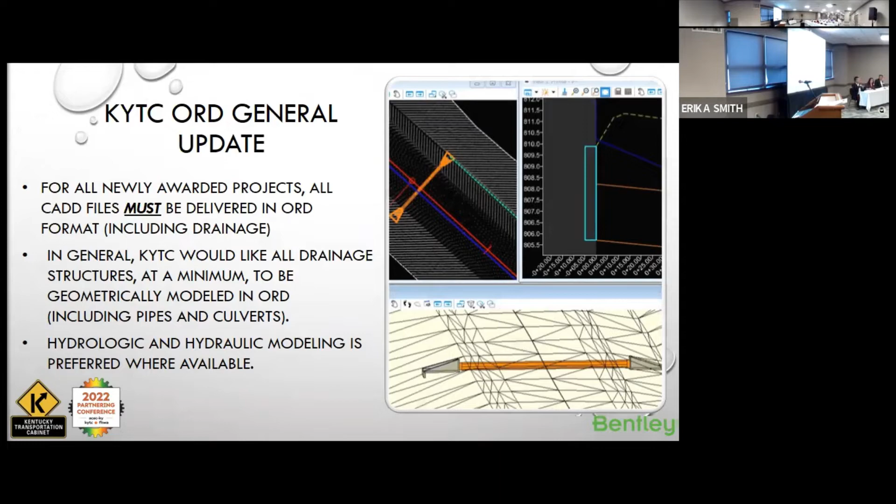Can y'all hear us okay? Yeah, can you? So ORD can provide many hydraulic and hydrologic elements, which means they can do rational runoff and storm sewer calculations. We have included storm sewer calculations and some spread analysis. We have not approved culvert analysis, so please continue to use HY-8 for culvert analysis.

We have actually now gotten inlet head calculations to work, now that we've gotten the ditches to be better feature definition with the new release of the ORD standards.

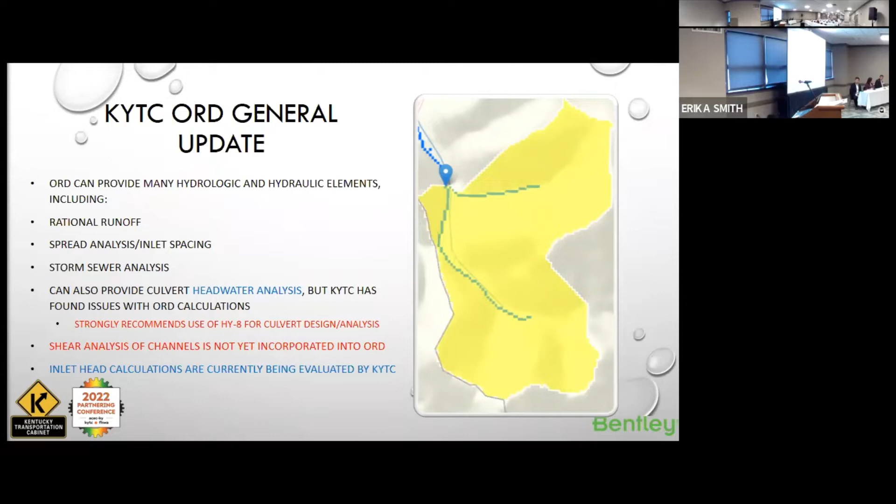And now to talk about parametric cells. So has anyone used parametric cells before or are familiar with it? Okay, we got one, I see. So why are we talking about parametric cells? Does anyone know what parametric cells are? We'll cover that. If you do, raise your hand.

All right, so the current workflow for ORD EU is to create an individual cell or pair of cells for every single node, and creating those cells and a combination of cells is a big pain. So has anyone ever had to create any part of that workspace or had to create their own cells before? I see a lot of ORD users. If no one has done that, it's okay, but it's an important skill to probably learn how to do if you need to create something that's not available in the workspace.

So the problem with this method is that it takes forever. You could potentially have thousands upon thousands of different combinations depending on your state, because you guys have a lot of different standards, a lot of different combinations of top and bottom nodes for your vaults or your inlets.

So what are parametric cells? These are kind of special cells that you can create using variables and equations and definitions that are grouped into variations. So what that means is you create your standard detail sheet and you have a box that has all these dimensions on it. But when you're using regular MicroStation, you're just drawing boxes by hand and it has no smartness to it, right?

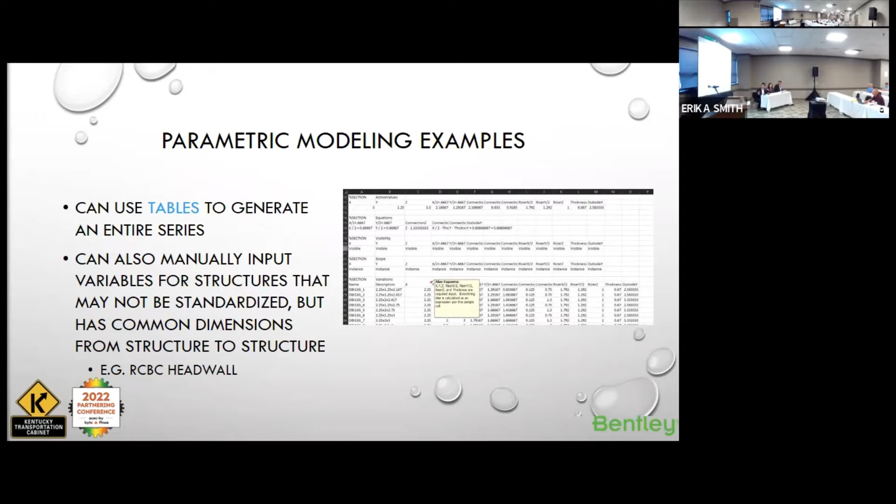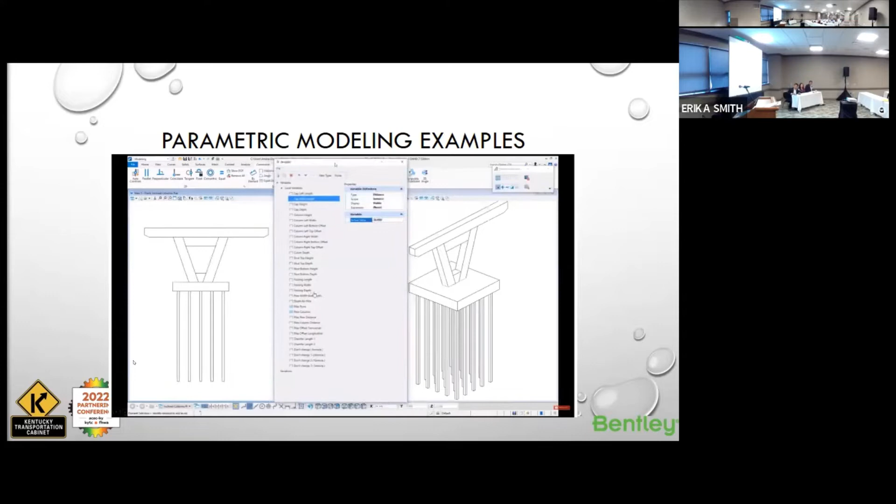So here's an example of using parametric modeling in a bridge scenario, and this is kind of required for certain bridge features. Has anyone ever used ORD or OBM? In this case here, we have a parametric cell created for different parts of the substructure for this bent, and I'm just going in and selecting different parts that I had already created and typing in a variable.

So as I'm changing some of the values, you can see it automatically changes right there. I didn't have to go in and create a fence and stretch or redraw or reproject anything. I had already figured out how it's supposed to act, and now I can just key in the value for that.

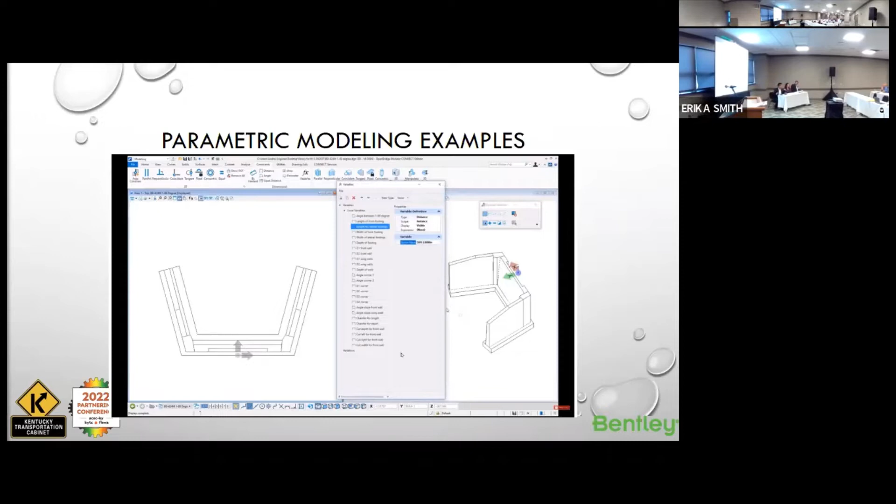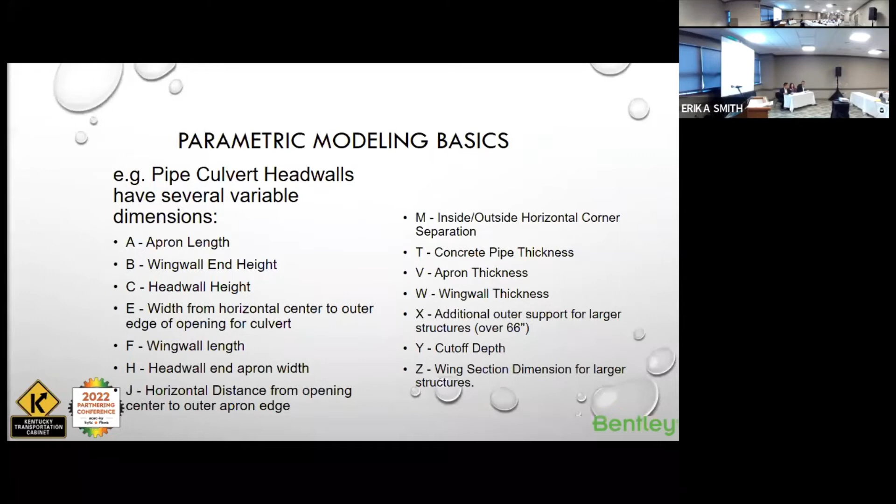So an example of where you could potentially use this in EU is obviously for head walls, where you have a lot of these standard variable dimensions that you can customize into your parametric cell, so it looks more familiar to you. Your Z value might be different than my Z value because I don't do work here, but you can customize it any way you want.

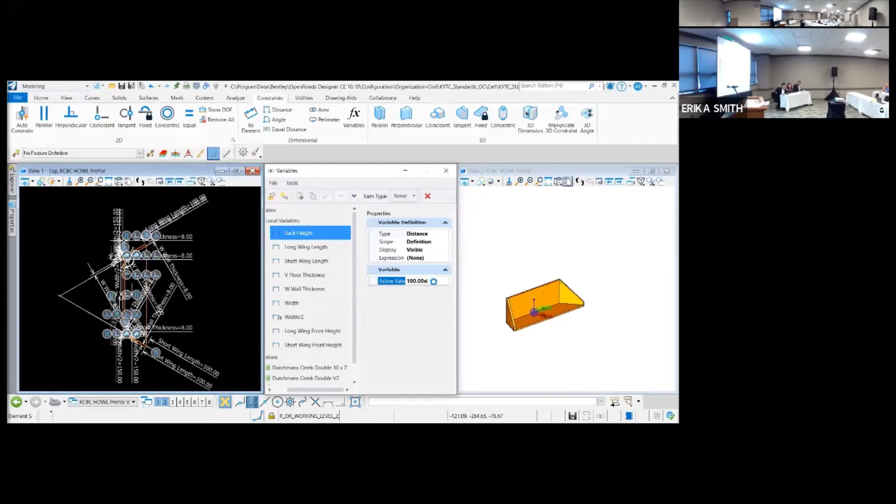So here's an example of one of your detail sheets, and you can see you have all these different variations - A through J, or A through Z. This is kind of what it looks like: on the right you see your 3D side, on the left you see kind of how it looks. You have all these different kinds of MicroStation constraints, and you can go as crazy or as simplified as you want. You can use this for 2D or 3D.

And here I'm just changing some of the values for the wall thickness, and you can see that it's a lot thicker.

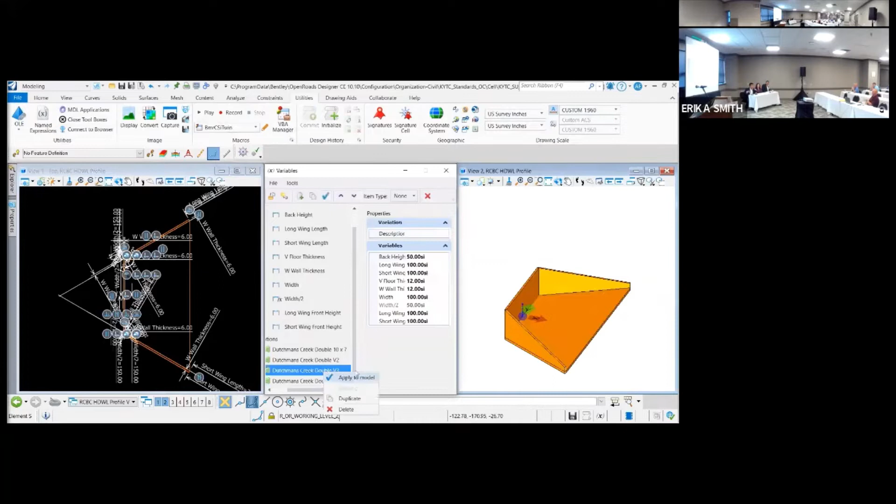And after I change some of these individual values, I can save them as a separate variation - it's a group of variables. So if I know that 12 variables change between one version and another version, I can save them as different variations. Now remember, this is just MicroStation cells.

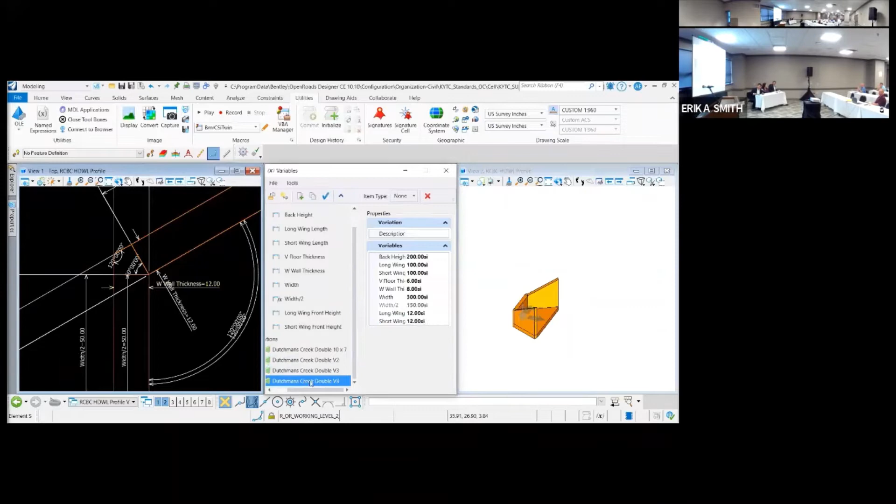So there's not anything smaller. You have a lot of different options where I can hide the different constraints, I can hide the different dimensions. You can see there, I typed in wall thickness equals 12, or 10.

So other examples are sloped and mitred headwalls. I mean, it's really anything three-dimensional or two-dimensional that you typically draw over and over again, which is the definition of what a cell would help you with. But parametrics adds that smartness to it.

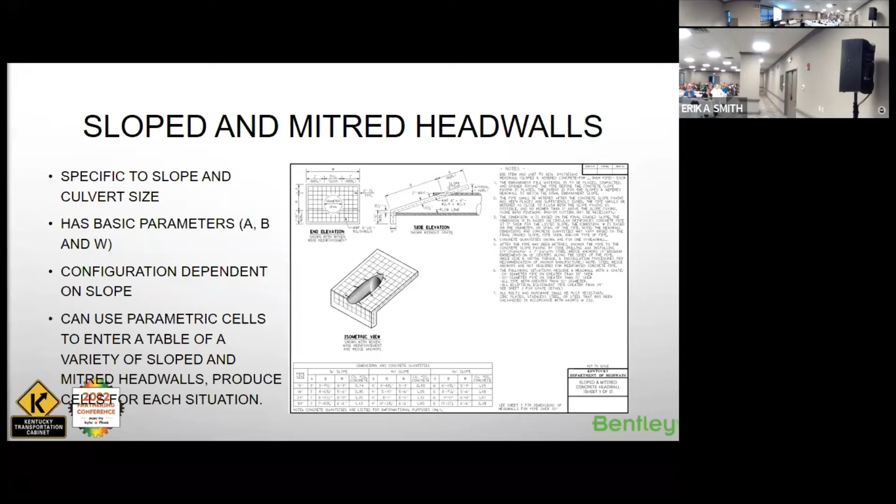There's a lot of tips and tricks that Erika will go through later, but if you start playing around with it, you can see how it can be very powerful and kind of streamlining some of the tasks that you may do. You can use this for not just bridge, you can use it for anything really in MicroStation.

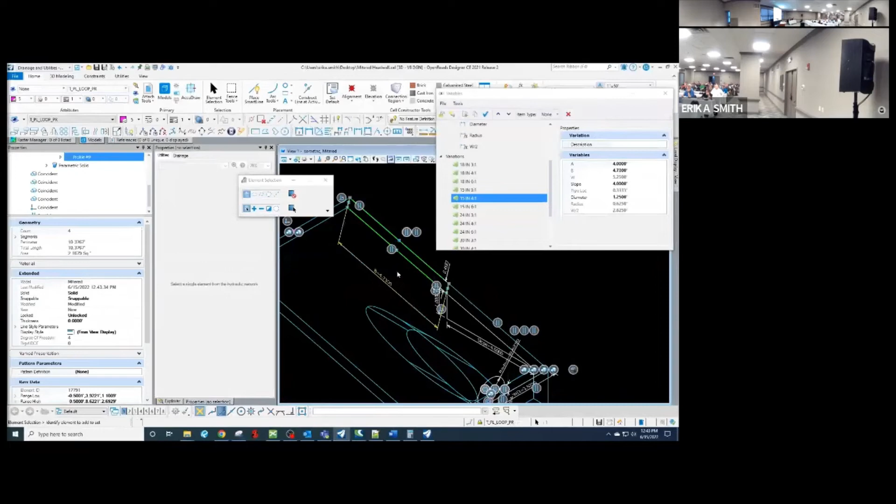You see a lot of mechanical engineers kind of gravitate towards this, or mechanical modelers, because they're used to doing machining and a whole bunch of different variations for different optimizations. But this will definitely apply in scenarios where you have a lot of details.

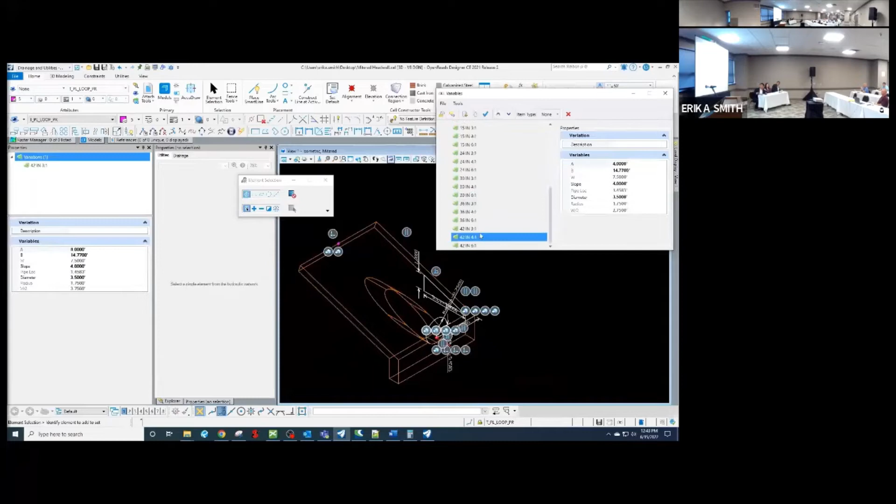So here, I'm just going in and selecting different variables, and it changes a bunch of the groupings, and you can do the whole width, the size, and the positioning.

So to show you what it is, if someone's ever looked at it before or done it before, this is the very basic definition of a parametric cell, or how to create one. So I'm just creating a box.

I don't know if you guys can see that. I'm just drawing a box. And I'm creating a new variable, so I'm just going to do X, Y, and Z.

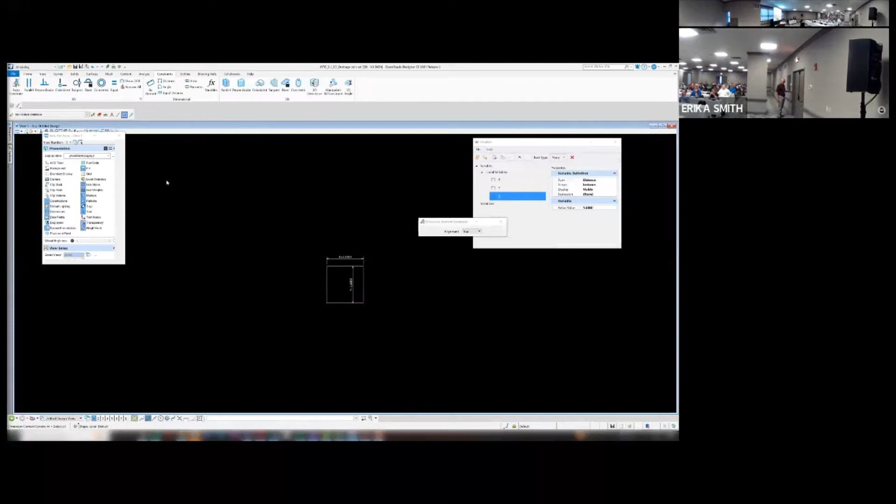And here I'm defining what those variables are. So I drew them and created variables, and now I'm going in and applying those variables to the different pieces of the box that I created for the square.

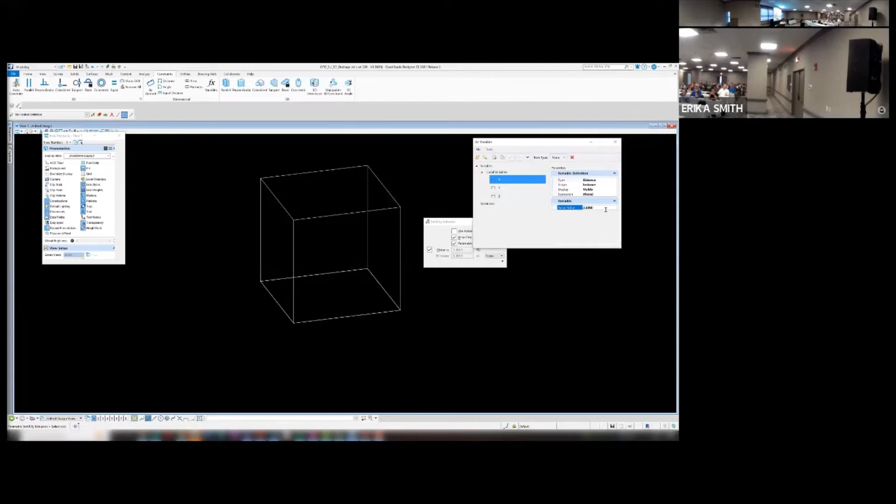MicroStation and OpenRoads by default has all of the same modeling capabilities, and 3D modeling tools and features. So I extruded that up, and now I'm going to apply the Z value to that extrusion.

And now when I go and change some of the variables, I do this as a test. I create a variable, I apply it to the MicroStation elements, I move it around, I test it. That's going to be very important if you start messing around with this.

I can turn on my constraints and my dimensions, and then I'm going to create a variation, which is a group of variables.

So it really is kind of simple, right? But this looks like it takes a while, especially after you do 1,000 of them.

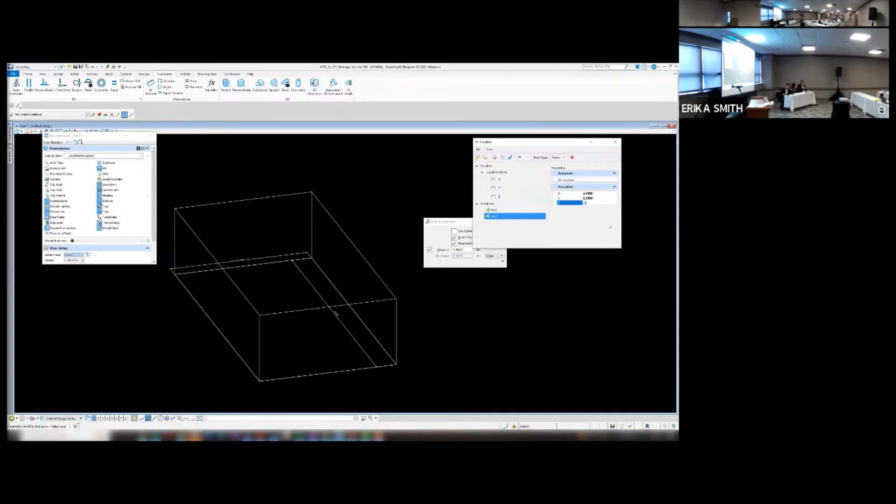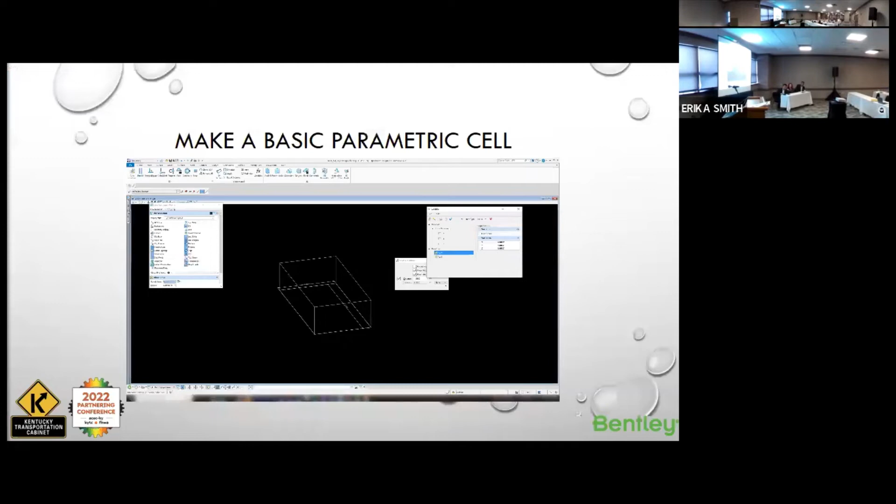And so I hit the check, move it around, I change some of the variables, I change the variation, and I apply it to see what it looks like. I'm constantly checking. So what this looks like, if you don't use DU, this is an inlet cell.

I mentioned before, you can export this to Excel. Really, that's one of the key parts of using this, in terms of having an Excel sheet.

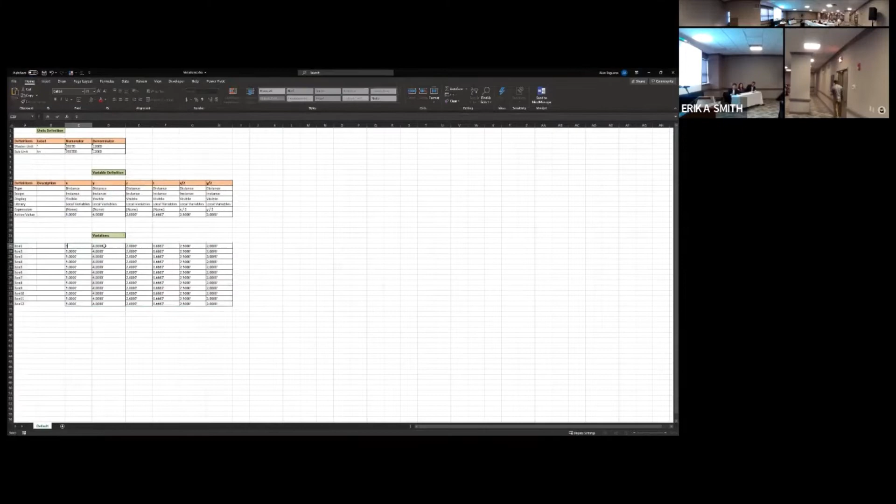So here I just created a bunch. You can just copy and paste it, if you have a PDF that has it

defined for you, or you can create equations, right? You can create mathematical equations. So if your definition or detail sheet says this is an equation of another variable, you can apply that here as well.

Part of the problem, or the challenge we face, is that right now DU has kind of a bunch of these different separate pieces. You have to create all these individual cells. Parametric cells can help streamline the process of creating those cells, but you still kind of have to apply it into a useful format for ORD.

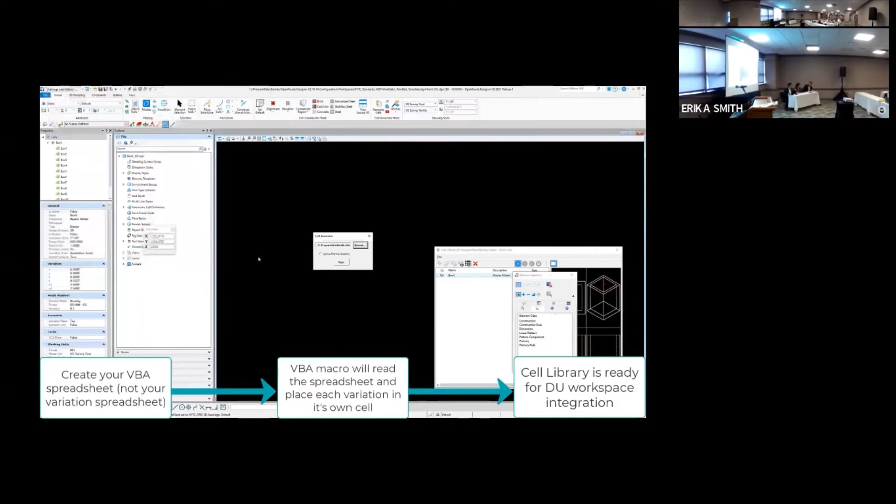And so there exists a VBA in which you can take one variable, or say one or multiple parametric cells, and it will create an individual, dumb, static, old school MicroStation cell for you to be able to utilize with DU. In the future, we hope this will go away.

See a lot of flashing in the background.

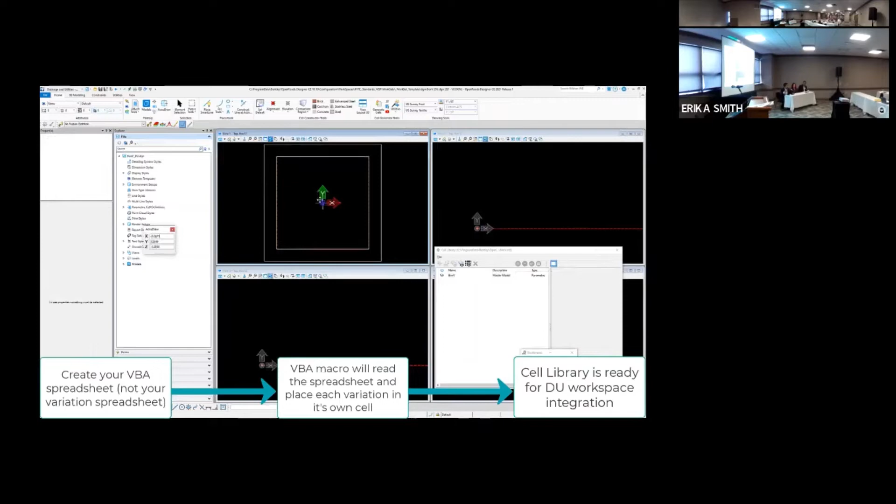Well, pretty much what this does is it goes down the Excel spreadsheet. It says, place this variation in this one model, create a new model, go to the next one, create the next, drop the next cell, put it in. So it does this kind of loop process to the end of the Excel spreadsheet.

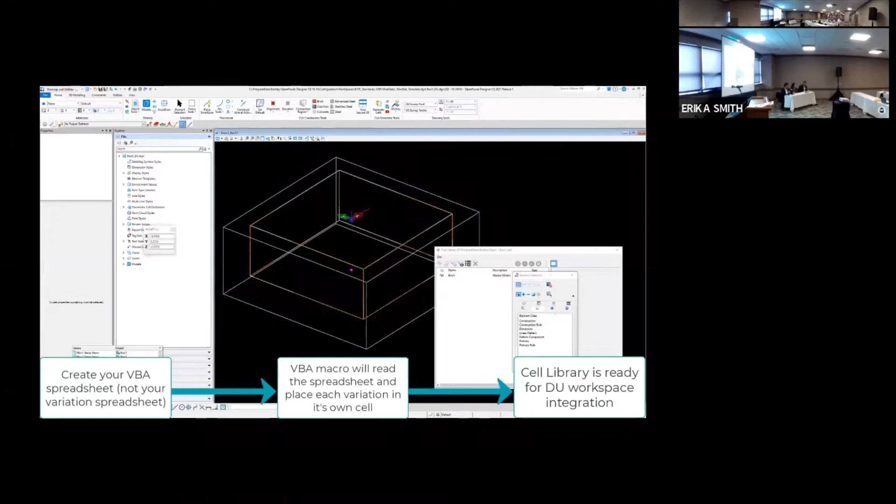So if I had to create a bunch of cells for a DOT and I had 1,000 of them, and I know that I had say like 1,000 different variations, I wouldn't have to manually go into every single model, every single cell, and modify every single one. I can instead create one cell, spend all this time creating one cell, drop it in, use my spreadsheet, use the parametric cell capabilities, and streamline the process that would normally take about a week, maybe 2 weeks, maybe a month, down to a day, maybe 2 days.

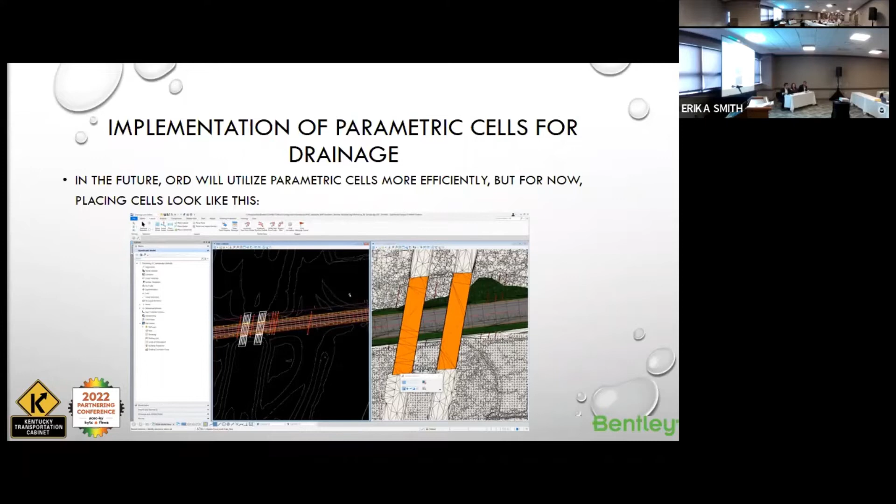So in the future, parametric cells will be used a lot more effectively with DU. But currently, in the current available product, this is pretty much what it looks like. So this is for anyone who hasn't used DU before. It's all kind of 2D/3D based. I have my 3D on the right, my 2D on the left.

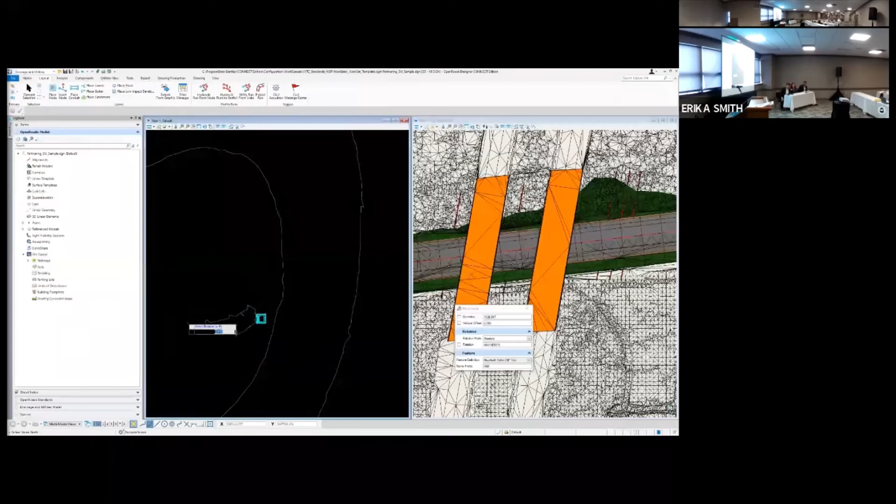And here I'm just placing a node. This could be a head wall, this could be an inlet. You notice here, putting it in the 2D and defining its rotation and its placement. I can even define its elevation, or if I'm reading a terrain or a proposed corridor. And on the right, it automatically places the 3D plane. Does this look familiar to anyone?

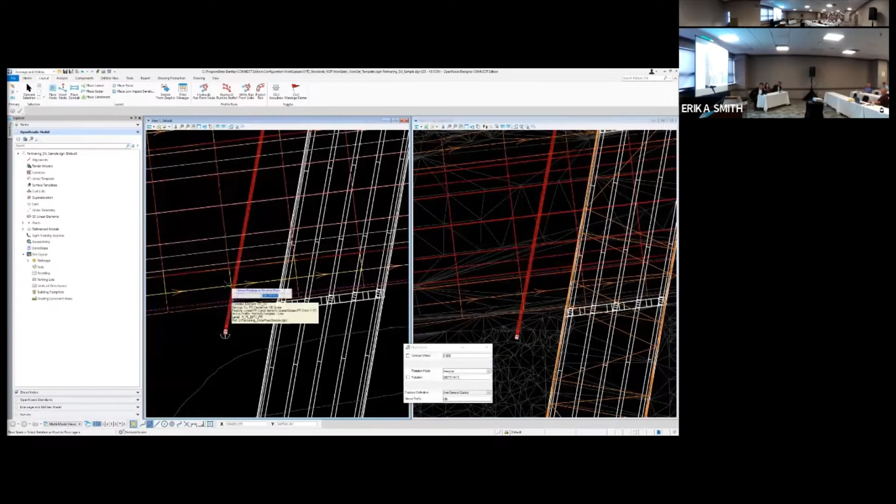So I did want to illustrate that I used the terrain model as the z-value the first time. In this one here, I'm using a proposed ground. And it's rule-based, so if I created an inlet and I dropped it on top of someone else's proposed corridor that's being referenced in, and that corridor changes profile or super elevation, my inlet should update with it if I have the right checkboxes.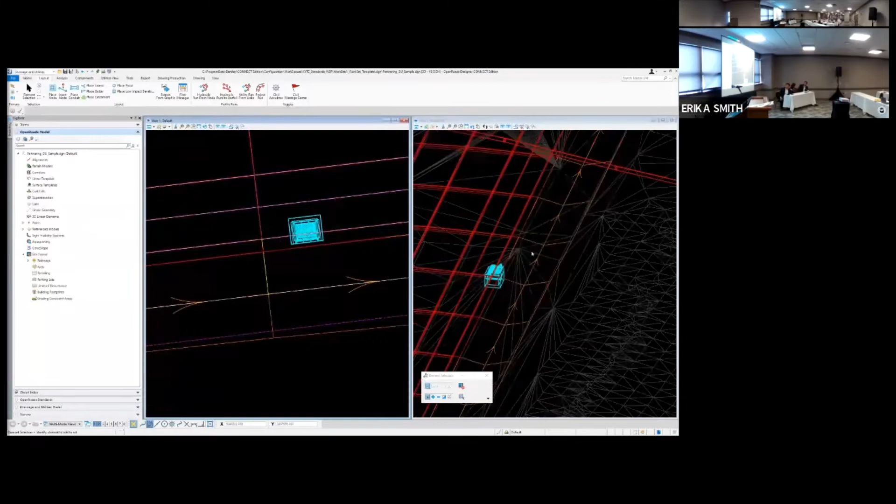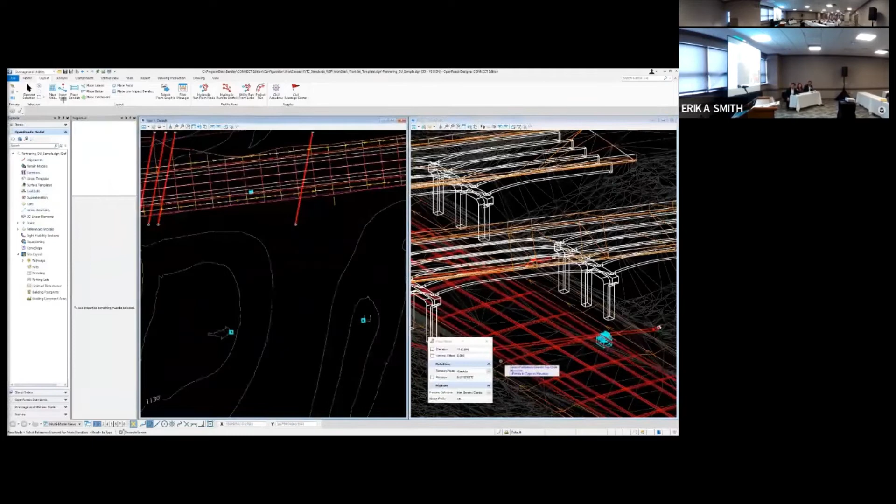Sometimes you want it to automatically update, sometimes you don't. In this case, I may not have wanted it to be automatically updated if someone changed it, but it's easy. I can just go in and change the value and make sure that my elevation reference is the asphalt surface, and it moves up. And here I'm just placing a manhole for a junction.

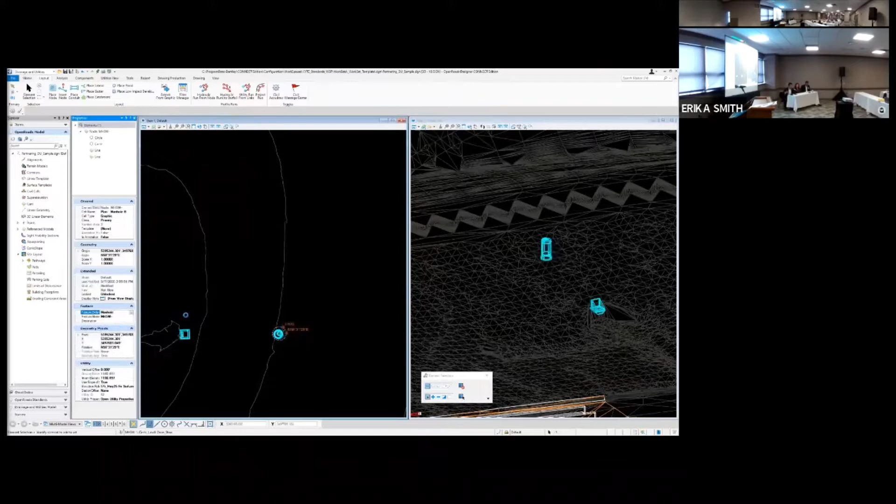After you place it, we want to get away from this idea of deleting and redrawing. I want to try to avoid deleting it because there's some intelligence to it. It's a practice that we should try to learn with ORD, much different than the older versions where there's a lot of delete and redraw. But here I just went to the properties and changed the node from one feature definition to another, one junction to another, and it changed.

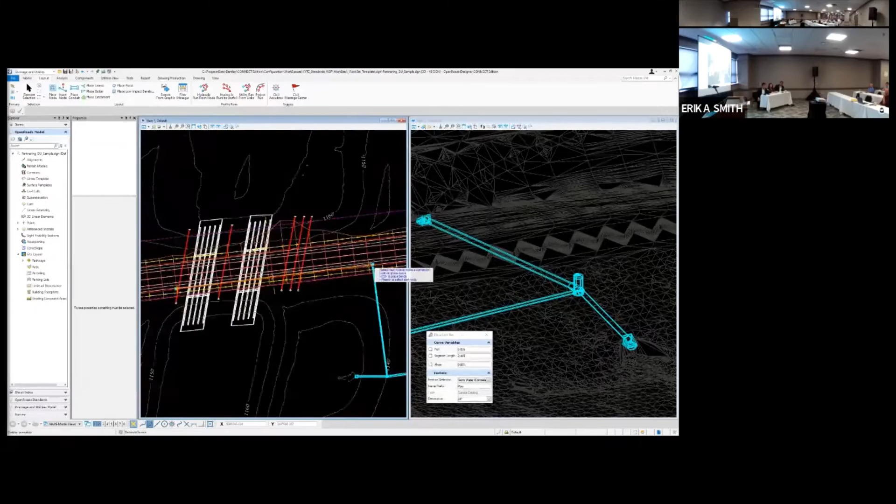I'm doing everything on my 2D on the left side, but you can see it's automatically being placed in 3D. It's also automatically choosing the profile for me based on some defined parameters, and I may not want that. How often do we let the software do everything on its own the first time? So I open up the profile view of one of these runs, hit the 3D cut button, and I can see the cross geometry. Anything in the 3D model I can see in my profile and cross sections.

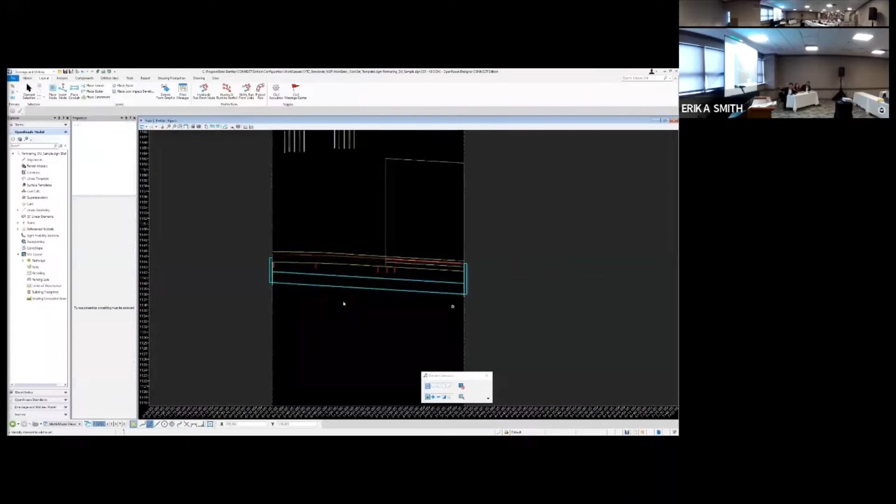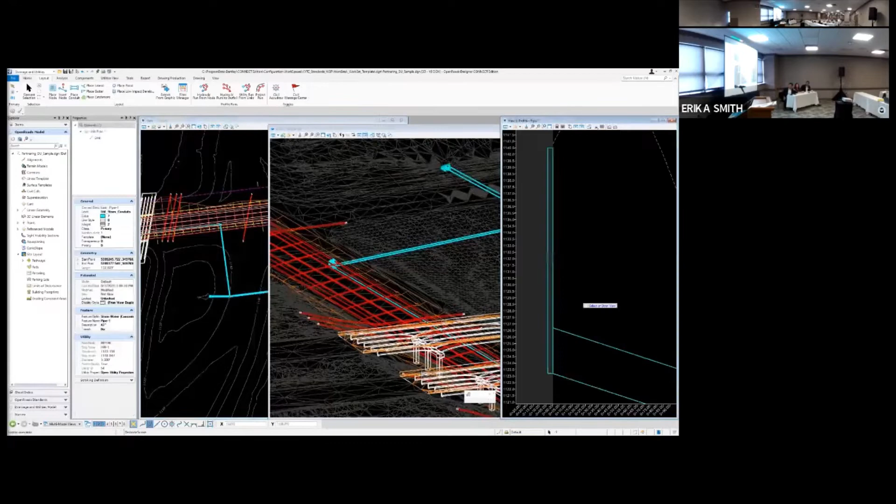I wanted to make sure I had enough clearance between some of my crossing utilities. All I did was go into the individual run at one pipe and change the profile. And you can do this a number of ways. Some of these might be static. I might have to change a pipe, or maybe change the inlet depth. But you have a lot of flexibility in modifications after it's placed.

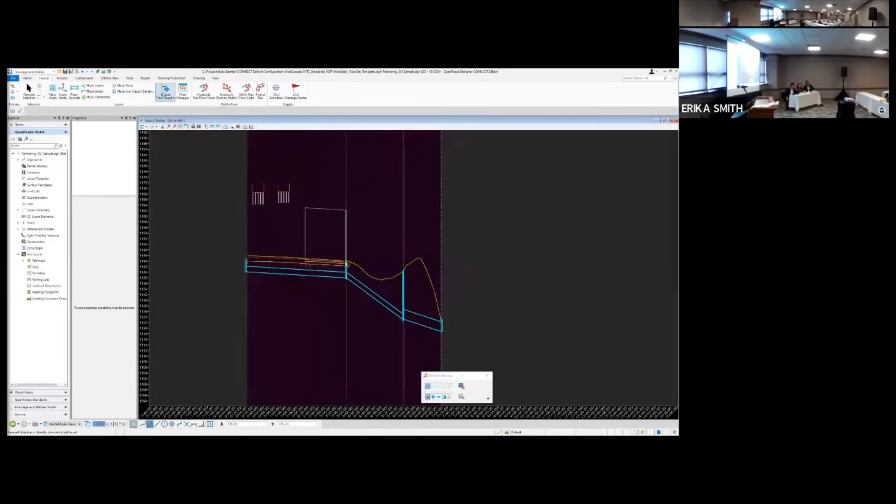If you update it in your plan view or profile view, it will automatically update in 3D. This is different from InRoads, where you had to process something and display it and go through each click. This happens automatically. Here I did the same thing. I can see my bridge, some crossing pipes, the asphalt pavement, and make sure I have enough clearance under the asphalt pavement.

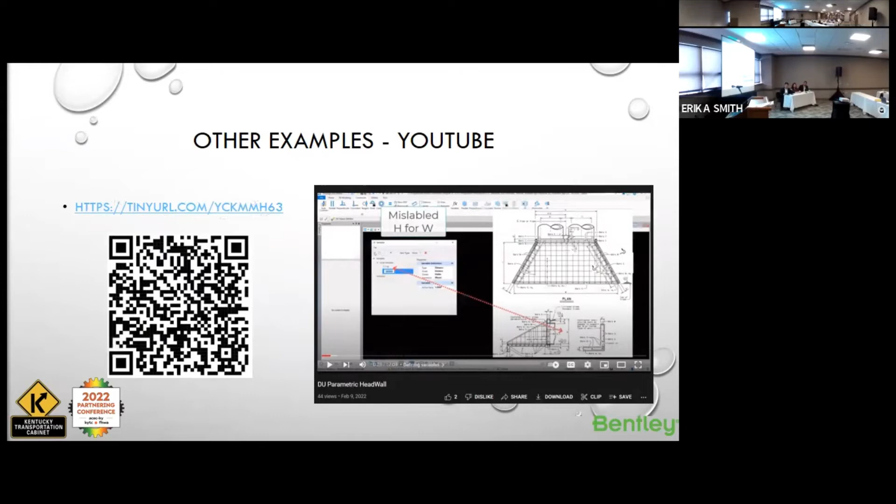So some tips and tricks that we found helpful were to make some helper lines. These helper lines help develop the parametric cell so that you don't have to completely constrain the parametric cell. This way you can constrain it to the origin 0, 0, 0. This video shows constraining some helper lines to 0, 0, 0, and then constraining it perpendicular and then rotating it. The video goes kind of fast, so I'm just explaining what's happening.

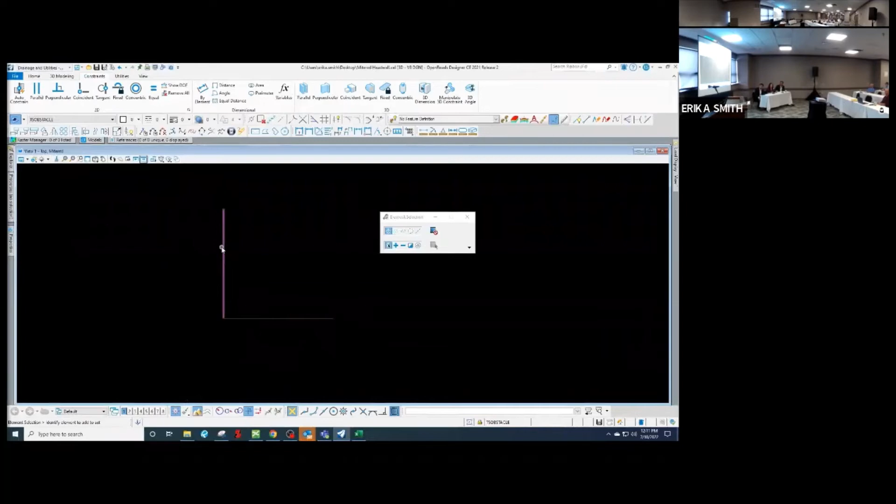I'm just drawing some lines and then drawing it at 0, 0, 0. Then I'm going to constrain it with a fixed constraint at 0, 0, 0. And then I'm going to constrain it with a perpendicular constraint just to have them rotate together. And I'm just going to move them to show that they're actually constraining 0, 0, 0. Kind of went fast, so sorry about that.

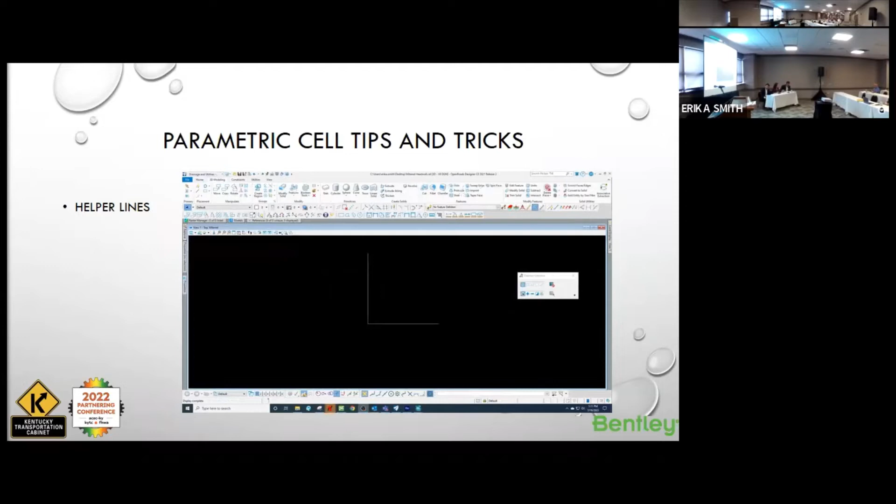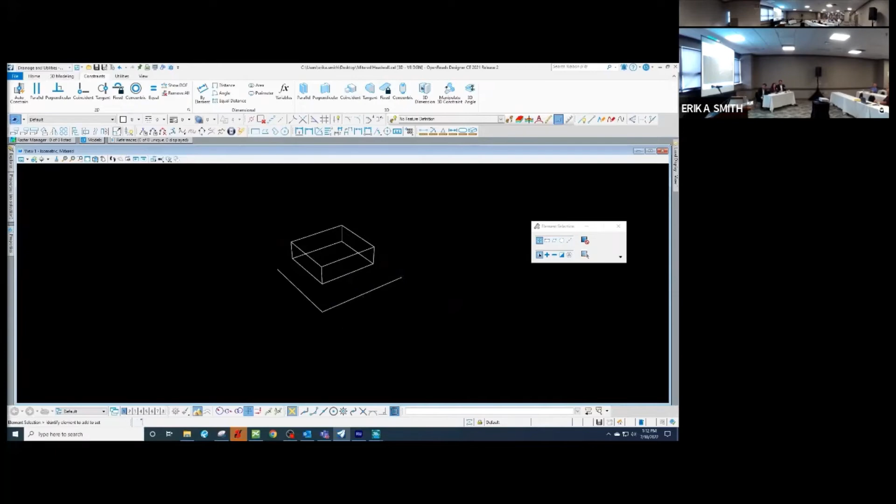And then you can actually constrain your parametric cell to that line. This video shows drawing a cell and then constraining it parallel to one of those helper lines, and then it will rotate with that. I'm just going to draw a box and then extrude it. And then constrain it parallel to one of those helper lines, and then move one of the helper lines, and it's going to show that the cell actually moved with the hover line. And this helps just keep everything clean and where it's supposed to be.

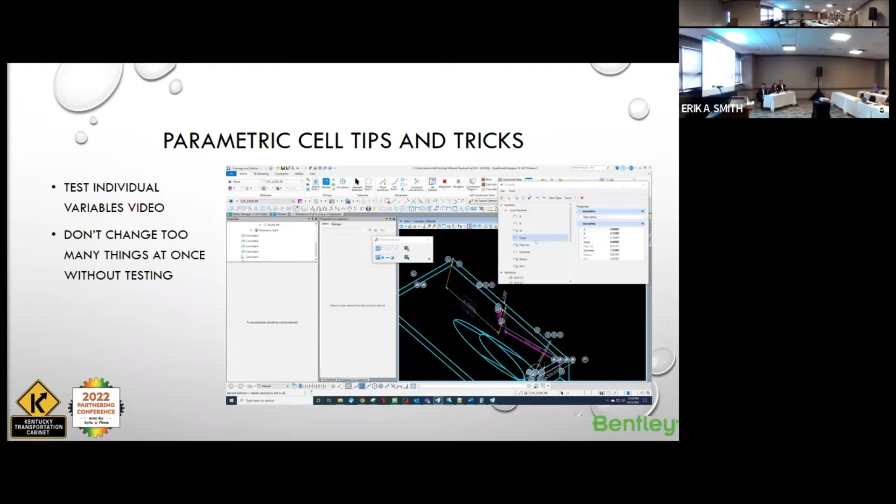As Alan mentioned, as you develop all these variables, you want to test them often. You want to not change too many things at once because you could break things and not notice. So this video shows testing a variable in different ways just to make sure that it works. So here I'm just changing a variable to make sure that it works. Changing it to 2 and 3, 4, make sure that it's expanding the way it's supposed to. You want to do this often to make sure that nothing breaks.

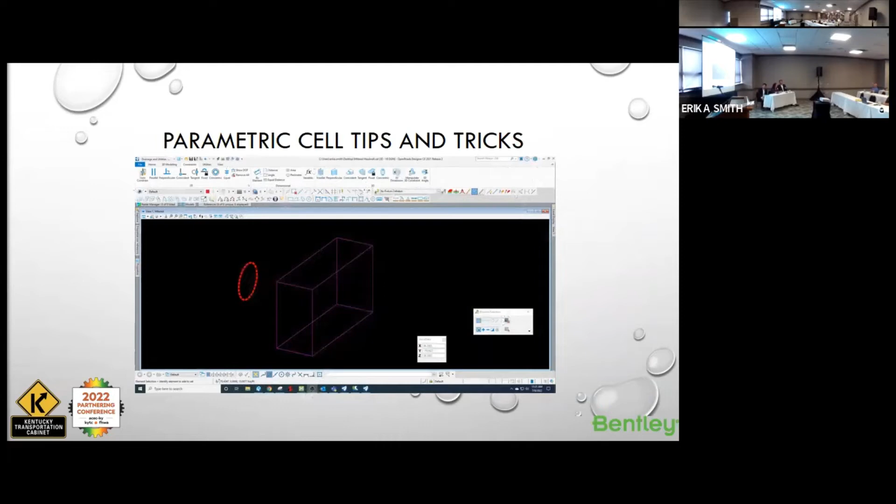Another thing is, since you're working with 3D objects usually, you want to make sure that your view is in the correct view. Because if you're constraining concentrically, you may not be able to constrain something to the correct face of an object. So say I want to constrain this red circle to the back of this object. I can't do that because I can't actually select the back of this piece in this view. So this video shows that. So I'm trying to select the back of it, but I can only select the face of it. So I have to rotate my view. So be very careful with how you've got your view oriented.

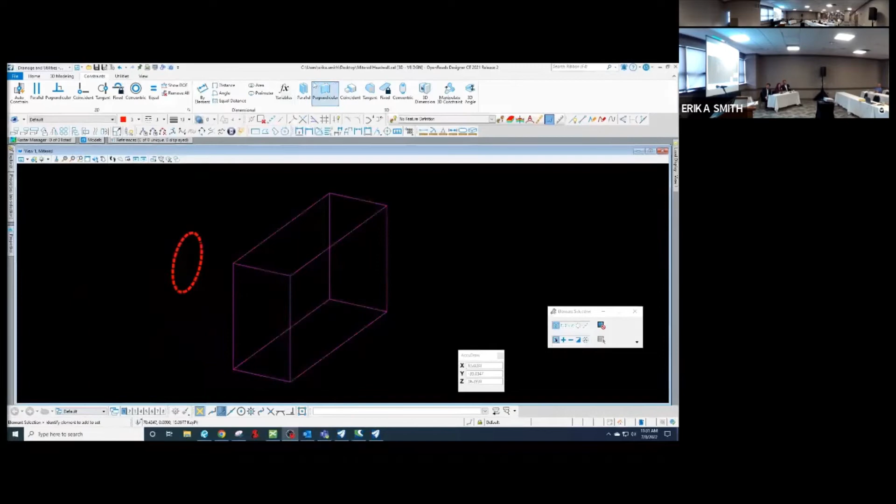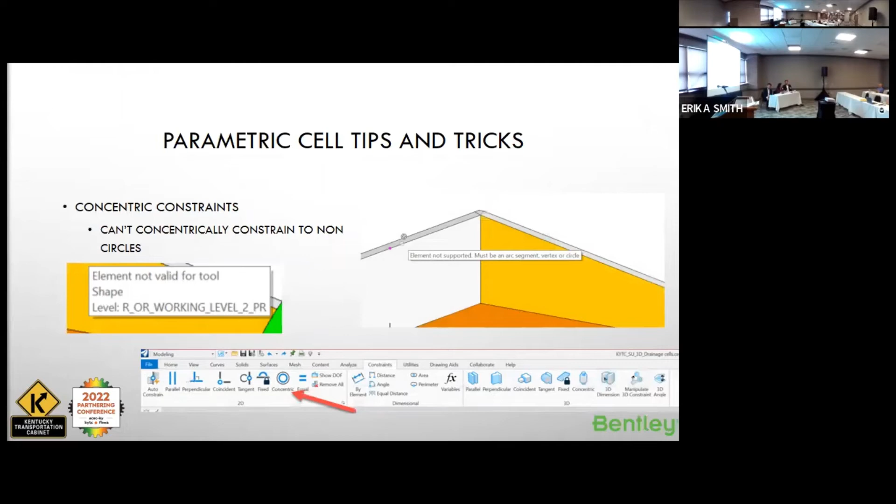And then also you cannot concentrically constrain circles to non-circular objects. So say you're trying to get the punch out for a pipe in the head wall, you need helper lines to help figure out where that center or where that pipe needs to be if you've got a multi-pipe head wall, because you cannot concentrically constrain that to go to the back of the head wall. Also, do not merge solids. I know it looks nice, but it will break the constraints of the parametric solid.

Also pay attention to your error messages. This will help with your testing of your parametric solid, because you can over constrain your parametric solid, and it's happened to me before, and I've had to unconstrain it completely, or unfortunately start over, as Alan has gotten frustrated with me. And then also set marks for undo, because this can also help with testing. This sets a place in the file for undoing to. This can help you to not have to completely start over.

So if you've got a place where you're pretty good with your parametric cells, set a mark and then continue to test it. And then if you mess it up, you can undo to that location where it worked. So the set mark for undo, this isn't new, this has been in the product for like 20 years. But it's kind of like you are the weakest link.

You guys familiar with that? Is that show still on? I don't know.

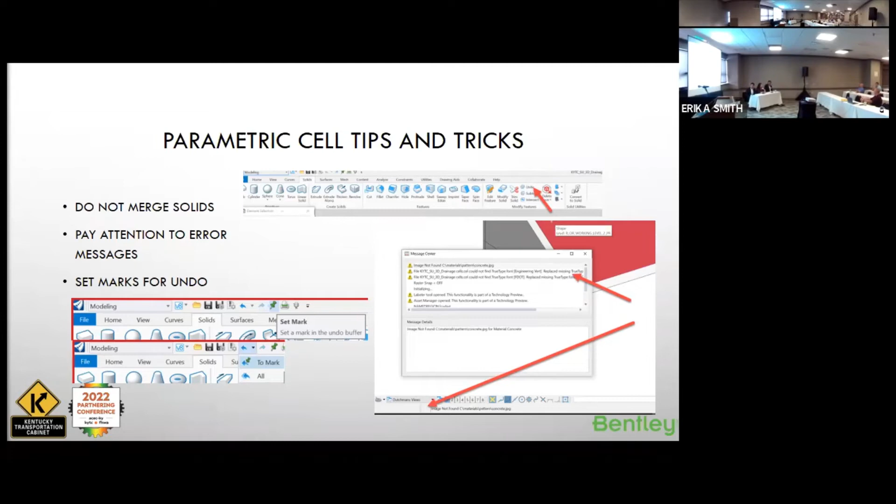But yeah, it's like you make progress and then you lock it in and you get that profit. It's like a save point in a video game where, okay, I made it through this section of the video game and I don't have to do it again. Hey, save this point. So if I screw up against the bad guy later, I can use this point. Same thing. Yeah, it's helped me a lot to keep from redoing. I'm a start over type person, and it helped me from starting over from scratch.

So, really, why are we doing this? Well, why are we promoting this, or why do we think that this could help? It's really because of that bottom quote, and I think it's from Abraham Lincoln. I don't know, I googled it. Can't trust everything on Google, but: if I only had an hour to chop down a tree, I'd spend the first 45 minutes sharpening my axe. And that really kind of embodies what this is.

I've had to do thousands upon thousands of these different kinds of cells the old-fashioned way, and parametric cells have been in MicroStation even in V8, V8i, but in ORD, or at least in this Connect version, it's a lot more stable and it works a lot better. And I never really connected the two until I thought maybe we could just use the combination of technologies that they have in the two different products. But it has significantly helped a lot.

Now, if you only have 3 cells to create, it's probably not worth it to spend all the time creating a parametric cell, unless you think you're going to use it later on for much more. But if you have hundreds of these, or hundreds of custom proprietary types of 3-dimensional objects that you could use as helpers for designing your roadway, or your bridge, or your drainage system, this could help you get there a little bit faster.

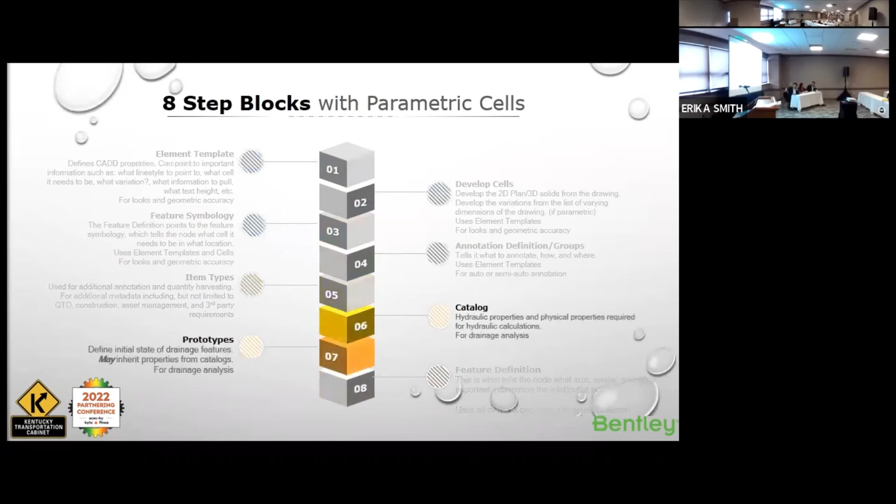When I talk about parametric cells, this is all MicroStation models, geometric models. But when we start talking about DU and hydraulic models, that would dive into the setup for the catalogs and the prototypes. Once you have all those things set up and defined, then you create your feature definition that governs how it works. It encompasses everything else above it. So block number 8 is your last step. Oh man, I had this really cool... Anyway, so that's your hydraulic prototypes, and then your feature definition is your absolute last part.

Why are we telling you this, if you guys don't ever really use this? It's because you see something that you need to customize, or you see something that's missing from a project you need. This is a basic foundation of how it works, so that you can go in and maybe copy something and modify a little piece.

Let me interject right here. We're talking about parametric cells, and they're great, and they can set out all these cells with minimal work. But realize if you're gonna make them usable, you still have to go through the steps for each one. Now, Bentley's aware of this. They're working on automating the rest of this process as well, but just be aware: if you create these parametric cells and want to use them in drainage utilities, you have to go through the rest of this for each cell that you created, so there's still some drilling down to work on. So, yeah.

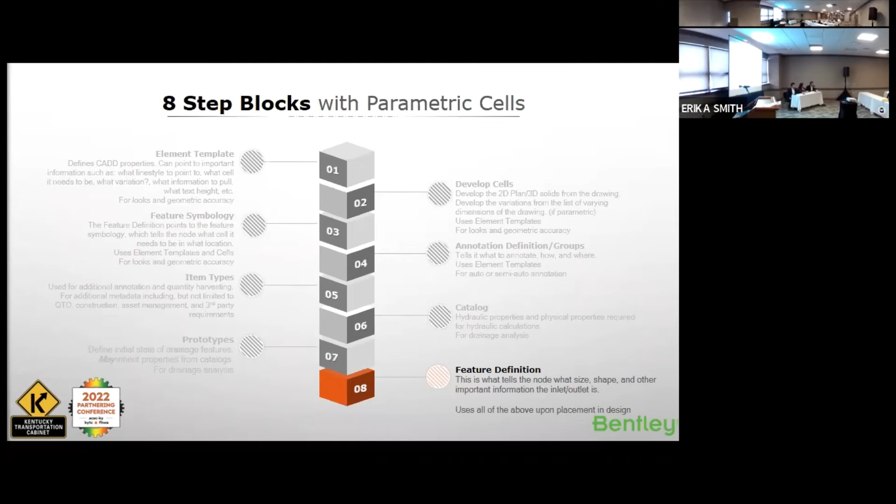So some other interesting things of the ORD drainage workspace is that we have a little bit more expansive workspace than SS2 storm sanitary, and we're working to expand it even more each day. We want to include parametric cells as well. We've got a couple in the works. We've got at least overall RCBC, and we've got a slope mitered headwall.

And then we also want to include every bit of the standard drawing for the workspace. And we also want to include non-standard stuff such as the slope mitered headwall. And we have also worked on item types for future annotation. We currently can't use item types for annotation, but we have it in the works for the current standards. So it's there, so please look for it in the MicroStation properties, but we can't use it for annotation yet, unfortunately.

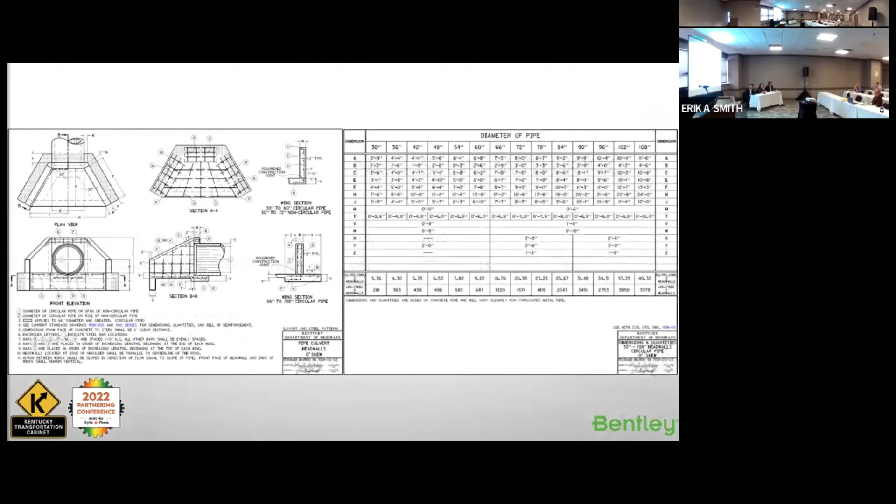And then what I'll do is I'll view it three-dimensionally, and this is something you do with any of the cells. You do it in SS2, but it's a little more prevalent in SS3: you can see your existing and proposed surface and where the stream is, the embankment for a headwall, for example. And rather than try to guess what the whole parapet you're trying to do, you can actually visually see it and just place it in there.

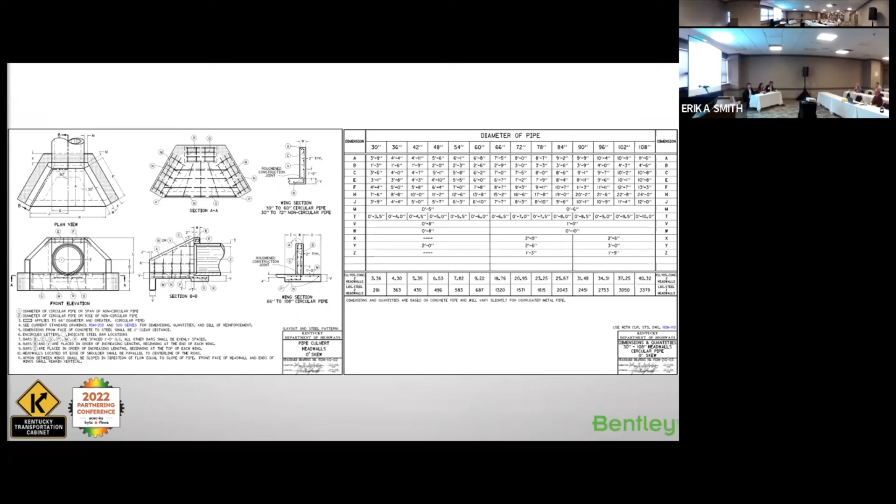Okay, so I've got this headwall that I made my best guess at, and I think a pretty good guess of where it needs to go, the stream on both ends. So I can put that in. I just punched in my parameters in the parametric cell, bang, there's my cell, I'm putting it in. Now I've got those structures, and I can modify. Okay, I need to modify this.

And I would like to say that you can go to that cell once you put it in and modify it, but you have to go back to the main parametric cell and redo it. But I think that's something that is actually being worked on as well. I'm not sure. But you bring that revised cell in. Okay, here's the modification you want to make. You come up with that final cell, you punch in the parameters, bang, drop it in, there you go.

So there is still use for parametric cells, even though we provide a lot of these cells for you. Just again, keep in mind those 8 steps that are involved in getting a parametric cell where it's actually usable to you.

Finally, other things: we know that you all have problems with productivity as far as making a plan set. And we know that's just generally for the authority, not just drainage. Bentley is constantly working to help us fix that. We've been working with Robert Garrett, who helped us create the library and who's been doing the training. We continue to work with him to come up with the best methodology and workflows to produce a set of plans. That's an ongoing thing.